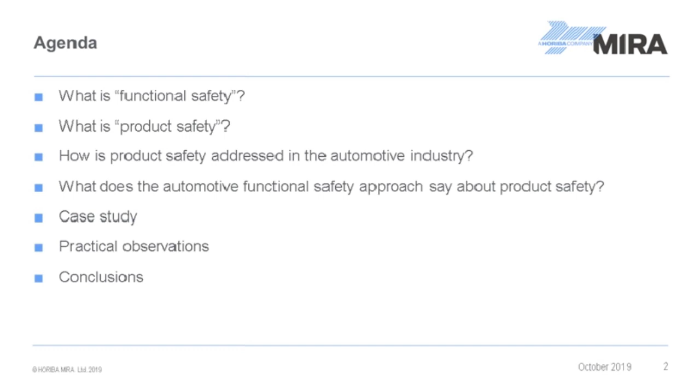So first of all, what do we mean by functional safety? There is a textbook definition which states that functional safety is the part of the overall safety of a system that depends on that system operating correctly in response to its inputs. This is an important definition because it recognises that what we specifically call functional safety is a subset of the overall safety issues associated with a system or a product. And it's particularly concerned with where we use a technology-based system to perform some activities, and if the system does not do those activities as required or as specified, then a potential safety issue may result.

Looking across many industries, we find a number of different approaches to functional safety. In some sectors, functional safety is particularly associated with where we deploy a designated safety system to monitor a system for adverse conditions developing and to take some action such as a shutdown system. So a designated system is designed and deployed to reduce the risk associated with a particular hazard. And that's an approach that we find in many industrial contexts.

In the automotive industry, and especially in the standard that we use for functional safety, ISO 26262, the specific focus of functional safety is in addressing hazards that can result from malfunctioning behaviour of electronic control systems. And this is a definition and a scope that recognises the fact that the modern road vehicle is highly dependent on its electronic systems and the software embedded in those systems. The electronic systems control many of the safety-related functionalities on the vehicle, such as powertrain, braking and steering, and if the systems misbehave, if the systems malfunction in any way, it could potentially cause a safety issue.

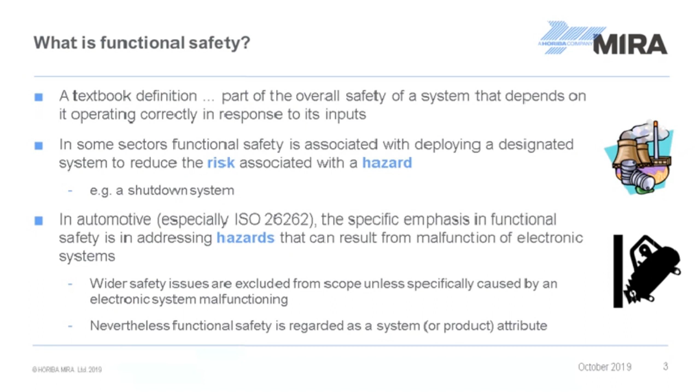Before I explore that topic in more detail, I should just mention that where on the slide I've highlighted particular terms in blue, those are terms that have a specific meaning or a specific interpretation in the context of safety disciplines. I will not give the formal definitions of those today, but those may be of interest for further reading.

So in traditional vehicle engineering, it's very common to set product attributes both in terms of objective attributes, such as range in electric vehicle mode, such as acceleration. We also set subjective attributes such as ride and handling, noise, vibration and harshness. Those are set as early attributes in the program definition so that we can then go ahead and design and implement a product that meets those attributes.

I strongly encourage that people view more technical subjects such as functional safety in the similar way. Within the standard ISO 26262, we have an activity called the concept phase, where in the concept phase we carry out a hazard analysis and risk assessment to identify in conceptual terms how the electronic product that we want to develop could malfunction, and as a result what safety requirements we set on that product.

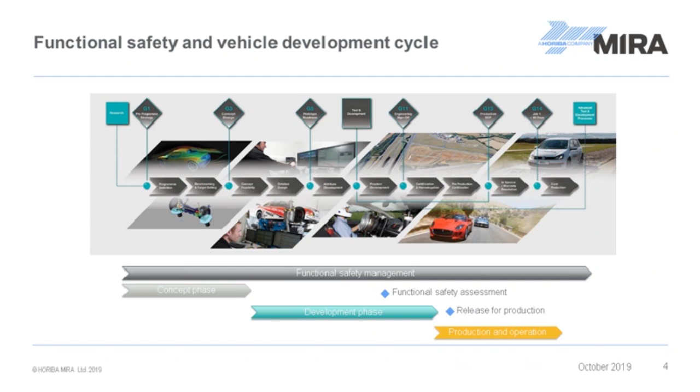Moving on to consider product safety. Product safety is a more wide-ranging area. It's more wide-reaching. It's concerned with all safety aspects of a product. And when we refer to product safety, we're usually understanding that to mean a consumer product. Product safety is covered by various aspects of legislation. In particular, there is a general product safety directive under which a product is considered safe if it meets all statutory safety requirements as set out in European or national law.

There is quite a long definition of what constitutes a safe product. You may search for this directive and read the text yourselves, but I would like to just draw attention to some key points from this definition, which is that a safe product includes a product which under normal or reasonably foreseeable conditions of use does not present a risk to users of the product, or where that risk is considered to be acceptable and consistent with a high level of protection for the safety and health of persons.

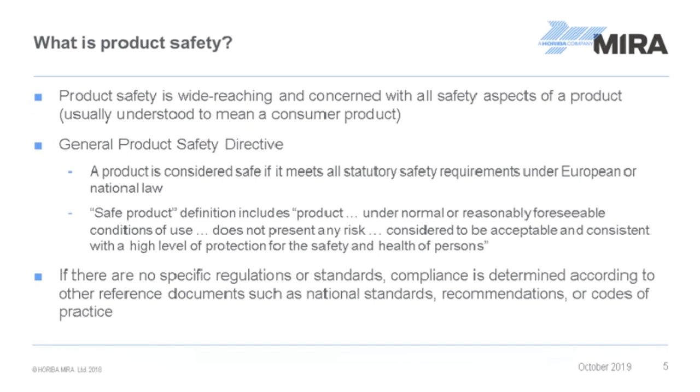Where there are no specific regulations or standards that apply to aspects of product safety, then compliance is determined according to other reference documents such as national standards, recommendations or codes of practice. So we may see that functional safety is a subset ultimately of product safety.

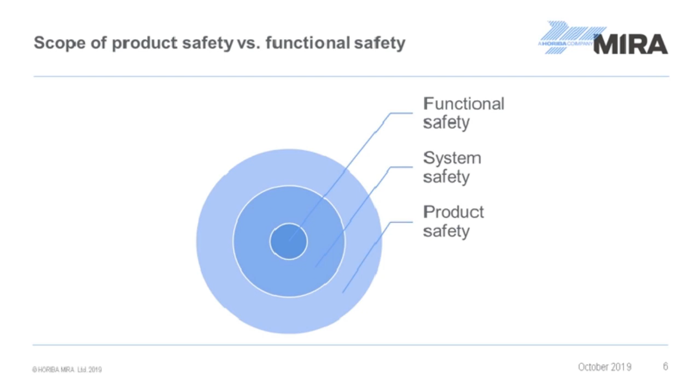We also find occasionally that people talk about system safety, so we may see system safety as being concerned with the safe behaviour of systems, whereas particularly in the automotive industry, functional safety is specifically concerned with safety issues that result from malfunction. So a key point that I'll be coming back to later in this presentation is that increasingly we recognise that functional safety in automotive, particularly as covered by ISO 26262, is a subset of system safety, where we're concerned with the correct and safe functionality of a product, not just its behaviour in the presence of malfunctions, and ultimately that is also a subset of product safety.

So more precisely, what do we mean by functional safety in the context of 26262, and how might this be related to product safety? There's a very specific definition in 26262 that safety is defined as absence of unreasonable risk.

Many approaches to safety, including the General Product Safety Directive, are based on an approach where we evaluate the risk associated with a product, and if that risk is not judged to be at a level that's considered acceptable, then we need to take measures to reduce that risk.

Within 26262, the term unreasonable risk is used, and one possible source of this is motor vehicle safety legislation in the USA, which establishes the principle that the public is protected against unreasonable risk of accidents occurring as a result of the design, construction and performance of motor vehicles.

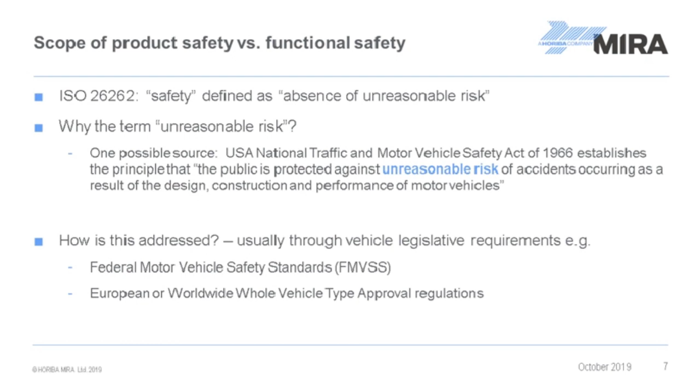So clearly the global framework for motor vehicle safety is concerned with product safety, and this is addressed through vehicle legislative requirements such as, in the US, the Federal Motor Vehicle Safety Standards, and within Europe and other parts of the world through whole vehicle type approval regulations.

So looking at how product safety regulations are applied in the automotive industry, every nation or every area of the world where vehicles are sold or put into use will have its own approaches to vehicle regulations. Many of these adopt the national or international regulations, such as the worldwide type approval regulations, but there may also be some local approaches that apply as well. So, for example, in the UK, we apply the whole vehicle type approval process, but we also have the construction and use regulations, which are our specific UK approaches.

Many of these legislative approaches are concerned with product safety, but often these set minimum requirements. There's an assumption that a vehicle manufacturer will be following an engineering process, and often the regulatory approaches are a check that an appropriate and thorough approach is being followed. But often driven by general product safety concerns and also by considerations of product liability, manufacturers will often go beyond those minimum requirements that are set in legislation.

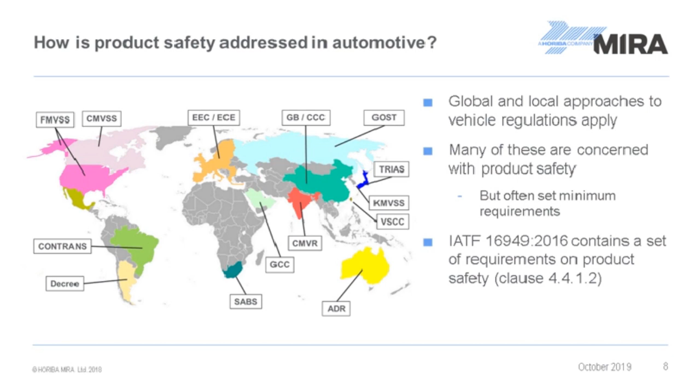The other factor which exists in the automotive industry is our approach to quality management. This is found in a document called IATF 16949, which is essentially an automotive industry interpretation and extension of ISO 9001. This is often used as the framework to set quality management and process control requirements, for example, between a vehicle manufacturer and a supplier. But this document does contain a set of specific requirements on product safety.

Turning back to the subject of functional safety and ISO 26262, we've already noted that the scope of that standard is quite narrow compared to wider product safety. So does 26262 have anything to say about product safety, and how might we see the relationship between the specific activities of functional safety and the wider product safety activities?

The scope of 26262 is deliberately narrow because we specifically created a standard that ultimately is concerned with the design and implementation of safety-related electronic systems and the hardware and software within them. So we did not set out to create a product safety standard, recognising that the wider aspects of product safety are already addressed through other standards.

So the scope statements within ISO 26262 exclude functional performance aspects of a system, and they also exclude certain hazards. So it's a non-comprehensive list, but topics such as electric shock, fire, smoke, heat, radiation, etc. are what we often call specific hazards or particular hazards associated with the technology.

In the case of a traction battery that's used in an electric vehicle, for example, there are hazards associated with potential exposure to hazardous levels of electrical energy. That is a wider product safety issue. There are other standards and regulations that deal with aspects of that. It only comes into scope of ISO 26262 if we are using an electronic system to monitor the performance of the battery and to control the performance of the battery in such a way that we avoid those events happening.

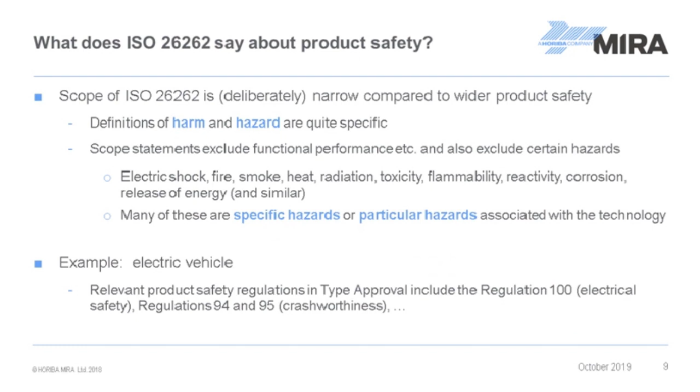So just to give some examples, relevant product safety regulations for an electric vehicle include the specific regulation concerned with electrical safety. There are also regulations concerned with crashworthiness. Those talk about the physical protection of occupants in the vehicle. They also cover electrical safety in the event of a crash and what happens during rescue and recovery after a crash.

So does that mean that ISO 26262 ignores product safety? Very resounding answer to that, no. ISO 26262 is concerned with product safety, but it recognises that functional safety is a specific subset of that, concerned with malfunctioning behaviour of electronic systems.

There's an introductory remark within 26262 that the processes that it contains can provide a framework within which safety-related systems based on other technologies can be considered. So it would be possible, if there is another technology-based issue that we need to deal with, that we could take some of the principles of 26262, particularly principles of hazard analysis and risk reduction, and adapt them appropriately for other activities. Although the core scope of 26262 is concerned with how those requirements feed through into electronic systems.

Secondly, ISO 26262 also acknowledges that in many cases the implementation of the systems, particularly around electronic hardware and software, will use common development processes. There's a slightly mysterious turn of phrase. Safety is referred to as being intertwined in other product development activities, and there's explicit acknowledgement, for example, in the way that we develop software, that a software development process will have to consider sources of requirements from other sources beyond 26262 and integrate those and align them with the 26262 process.

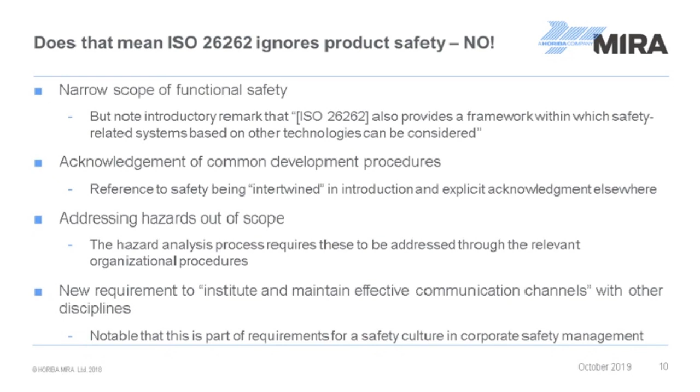And also, in the latest edition of the standard, we've introduced a new requirement to institute and maintain effective communication channels with other disciplines that may impact on functional safety. Originally, this was introduced by motivations concerned with cyber security, but other examples that are given here include mechanical engineering and quality management. So it's recognised that the functional safety activities cannot be viewed in isolation from wider product quality and product safety issues. And it's notable that where this requirement is given is actually in the requirements to establish and maintain a safety culture as part of the overall corporate safety management in an organisation.

Despite the narrow scope of 26262, it is now being acknowledged that there are wider system safety and product safety implications that have to be considered. One area where the industry is putting quite a lot of effort at the moment is concerned with the functional performance or nominal performance of driver assist and higher levels of automation functions in vehicles. And we're addressing that through a new set of requirements that are emerging under the title of Safety of the Intended Functionality, or SOTIF.

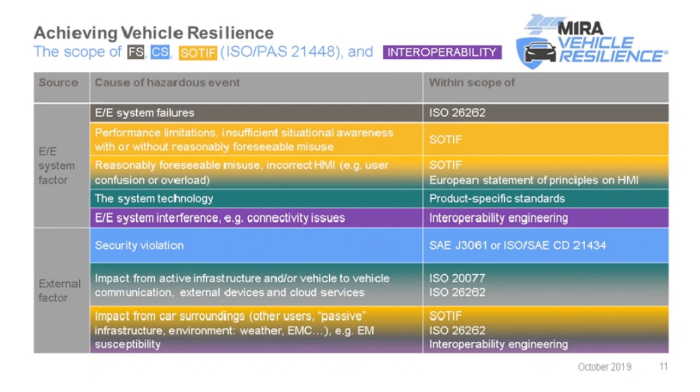I will not go through the details of the table that's shown on this slide, but this is just to recognise that it's now acknowledged in the scope of the work we're doing to develop the SOTIF requirements that the classical malfunctions that are addressed in ISO 26262 are one of only about 10 factors that address the overall product safety. So we see that wider activities such as cyber security, safety of the intended functionality, interaction with the environment and other systems, and even the human-machine interface are also important topics that have to be considered.

So pulling all this together, the functional safety approach that's found in ISO 26262 is very much seen as a subset of system safety and ultimately of product safety, as I explained earlier in the presentation. It's worth noting at the same time that approaches that are emerging for cybersecurity in the automotive industry are seen as having significant overlaps with the functional safety activities in some cases.

Moving on to consider system safety, the work that's going on to address safety of the intended functionality is a good example of how the automotive industry is addressing wider system safety issues. So how do we address and assess safe functional performance of a product in the absence of malfunctions? And ultimately, this is in the context of wider product safety as defined through the requirements of something like IATF 16949 and the legislative requirements in activities such as type approval.

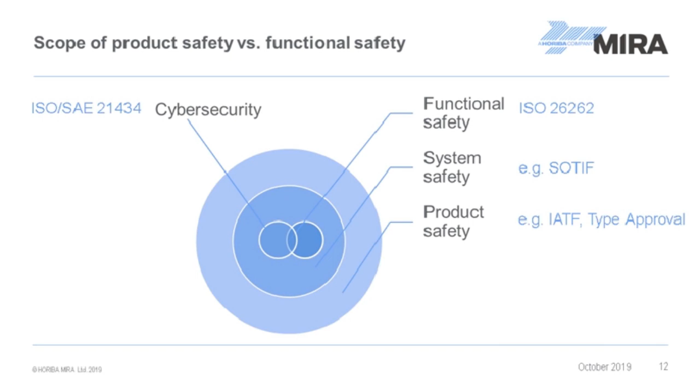So let me now share a brief case study. The example I'd like to look at is the example of an electronic steering column lock. This is an electronic system that is found in many vehicles that have keyless start, and it replaces the physical ignition key lock, and it's deployed in vehicles as a security measure.

When we approach this from a functional safety perspective, the potential failure modes that we would identify and the hazards that would result are things such as undemanded locking. So while the driver is driving the vehicle, potentially a malfunction could cause the steering column lock to deploy without valid conditions being met.

Secondly, a malfunction could be that the system fails to lock the steering column after the driver has parked the vehicle. Usually from a functional safety perspective, that's not considered safety relevant. It will not lead to harm to a person, but it is still considered a significant characteristic of the vehicle because potentially it could lead to a failure to meet legislation.

And another potential failure mode is failure to unlock. So before driving away from a park position, the driver starts the vehicle, but the steering column lock hasn't unlocked. As we do the hazard analysis, we assign safety goals and ASIL values to these, and then as we start the system design and implementation, we start to explore the design solutions for the causes of these potential failures.

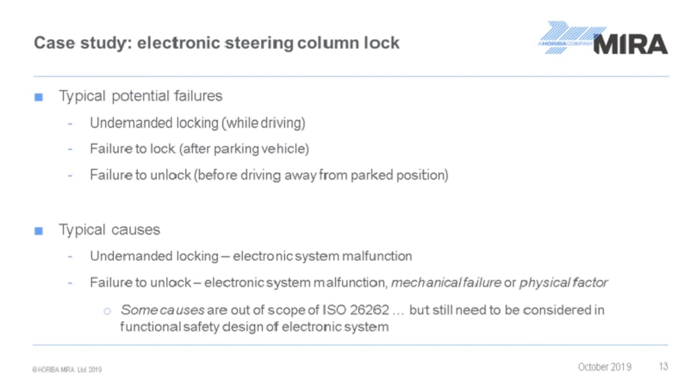So this is a very good example of something that has a mechanical or wider product safety root cause, which there may be a risk of people overlooking if they focus on the very narrow interpretation of ISO 26262. So it's very important in this case to consider the interactions with, in this particular example, mechanical engineering.

So to make some practical observations, the new requirement that's in ISO 26262 to consider the links and interactions with other disciplines is very important, and I strongly recommend that people performing functional safety activities do take note of those requirements, and equally so that people working in other disciplines in wider system safety and product safety are also aware of the implications and approaches being used to functional safety.

In the latest version of ISO 26262, secondly, we now have the possibility to consider an objective-oriented approach as we deal with novel or different technologies. There's now a route to demonstrate that the requirements and objectives of the standard have been met, perhaps through alternative solutions or different approaches to those ones that are listed in the standard. And again, that gives us the flexibility to adapt good practice from 26262 to deal with novel challenges and new technologies in vehicles.

Very significantly, many of the existing approaches and activities that we use for product safety, quality, reliability, particularly around things such as failure mode and effects analysis and design verification plans, are of course already wider product safety activities, and the specific activities that we need for functional safety should leverage and extend these. One of the most frequently asked questions I get about functional safety, particularly from traditional automotive engineers, is where does something like FMEA fit into this?

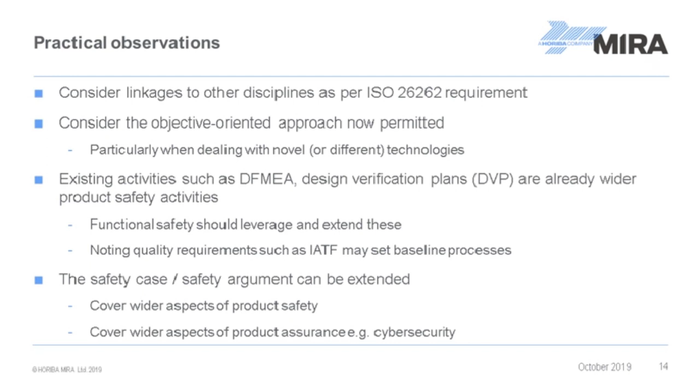But a safety case can be extended to cover wider aspects of product safety beyond just functional safety, and the safety case can also be expanded to cover wider aspects of product assurance, such as cyber security. So the industry has at its disposal a number of methods and tools that allow us to achieve product safety, system safety and functional safety, and to provide the evidence and the argument for how those have been achieved.

So to conclude, within this session, I've demonstrated that product safety in the automotive industry is a core product attribute. It's embodied in legislative requirements, and it's embodied in industry practices which build on and go beyond those legislative baselines. And in particular, because the modern vehicle is highly dependent on its electronic systems and the software in those systems, functional safety is a specific aspect of product safety that has taken on great significance over the past few years

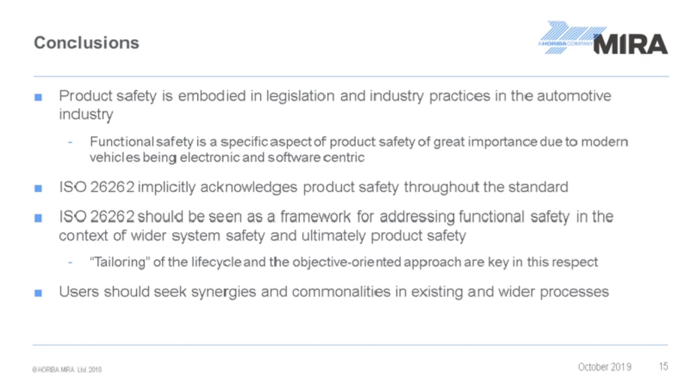in the automotive industry. Even though 26262 has a deliberately narrow scope, it does implicitly acknowledge product safety throughout its structure and requirements. And 26262 should therefore be seen as a framework for addressing functional safety in the context of wider system safety and ultimately product safety. And therefore, users of standards and industry approaches such as 26262 should be seeking synergies and commonalities in their existing activities and their wider processes.